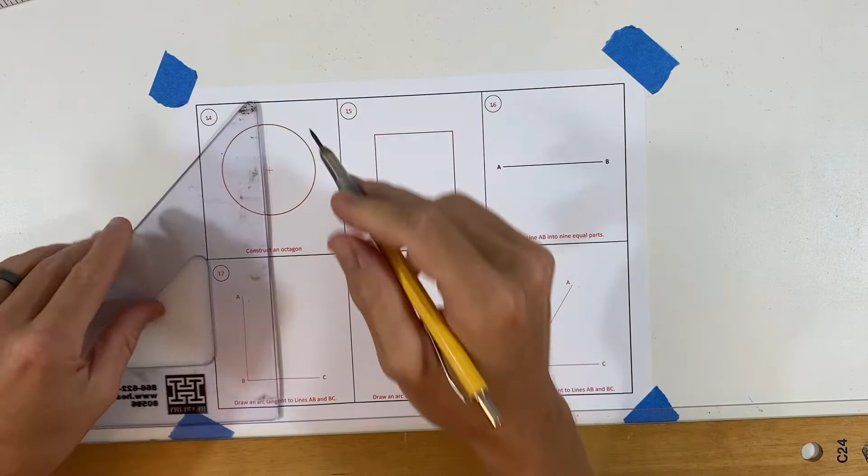This first method uses a center line and a circle. We already have a circle, we just need to complete our center line: long dash, small dash, long dash. It extends just beyond the outlines of the circle.

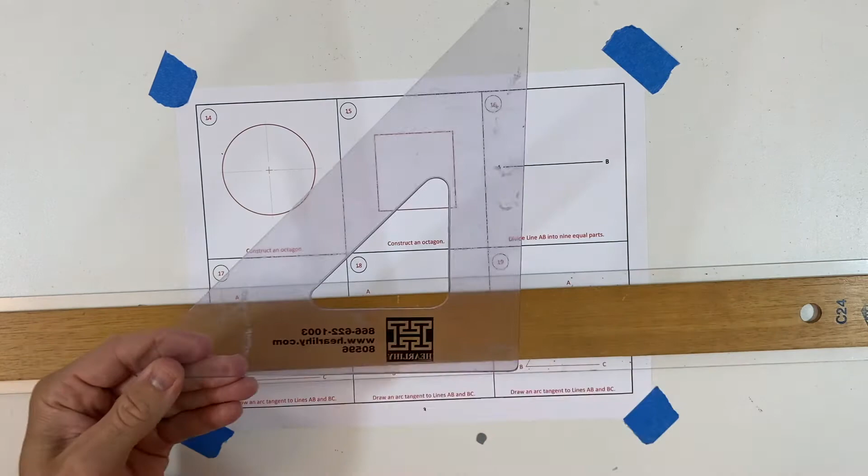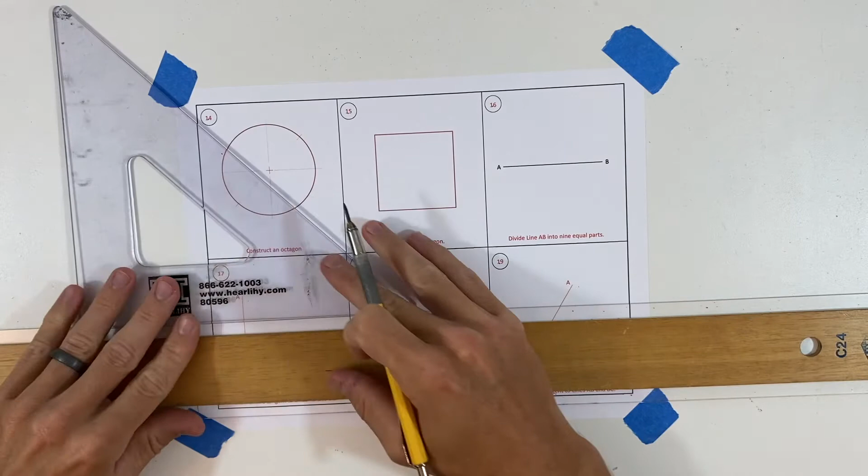Again, very light lines. The next step is we're going to draw two construction lines at 45-degree angles through the center of the circle. So I have my 45-degree triangle. I'm going to place it horizontally on my T-square, slide it over right until it lines up with my center point, and draw a construction line right through the circle. I'm really looking for this point and this point. I'm going to flip my triangle, the exact same thing on this side of the circle. Make sure your T-square doesn't slide off your drawing board.

And construction line, so extremely light. I'm looking for this intersection right there and there.

These intersecting points of the perimeter of the circle locate the exact points where the octagon will be tangent to the circle. Use the construction lines to draw two vertical and two horizontal lines that are tangent to the circle through the points located by the two center lines intersecting the circle.

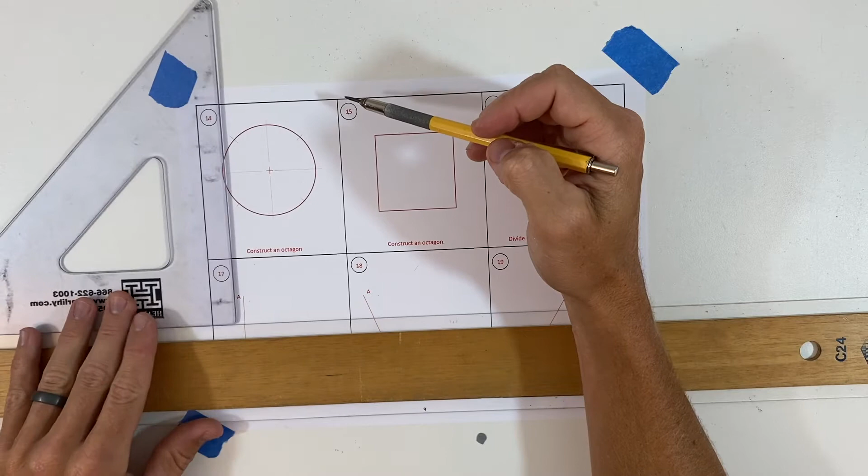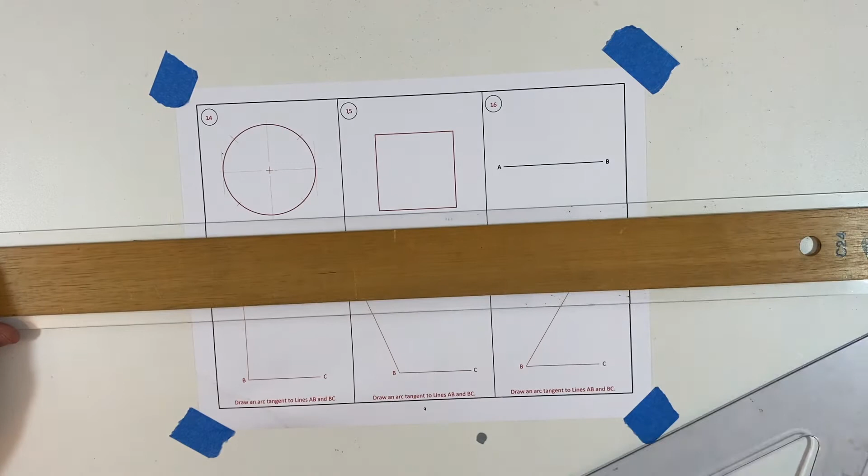So I can start by drawing vertical lines that are tangent to the edge of the circle. And a bottom and top line that is horizontal but still tangent to the circle. Make sure it is tangent, so it's touching but not intersecting.

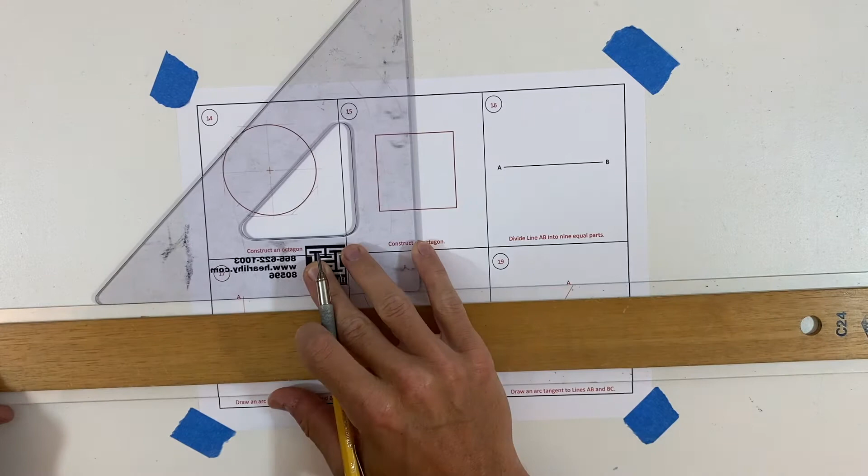Now I know exactly where to place those angled lines, right at those previous intersections. I could have done this in the reverse order because I know exactly where those tangent points should have been.

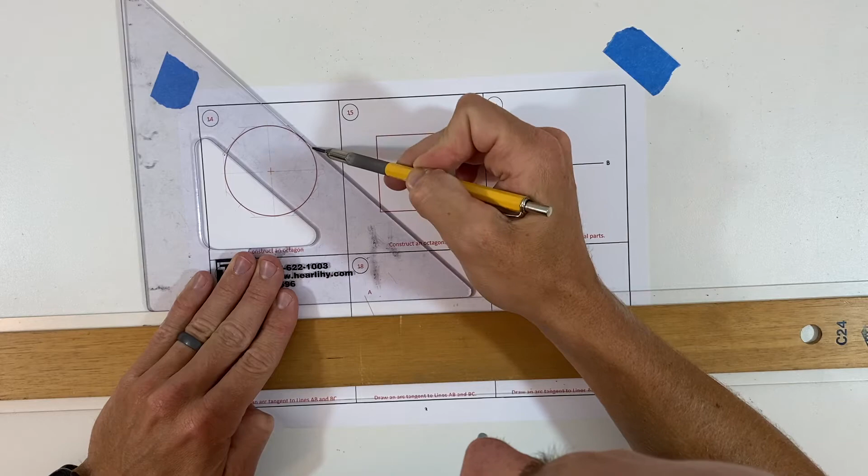Now I have an octagon, and I can clean up those edges with my eraser and eraser shield.

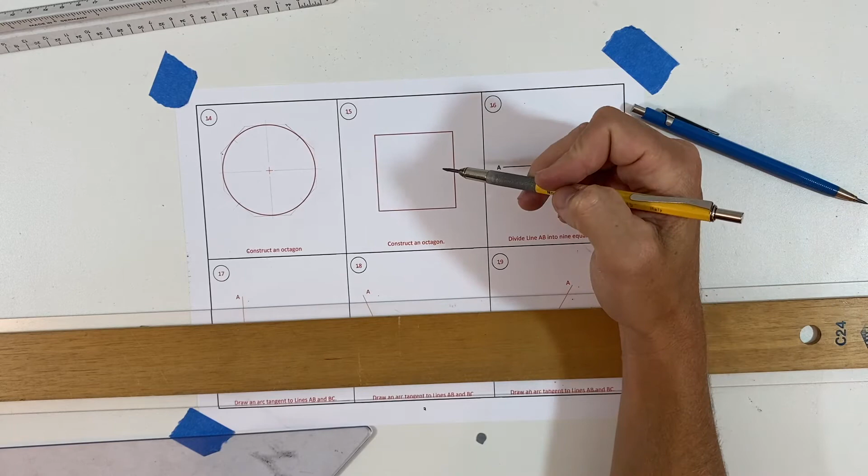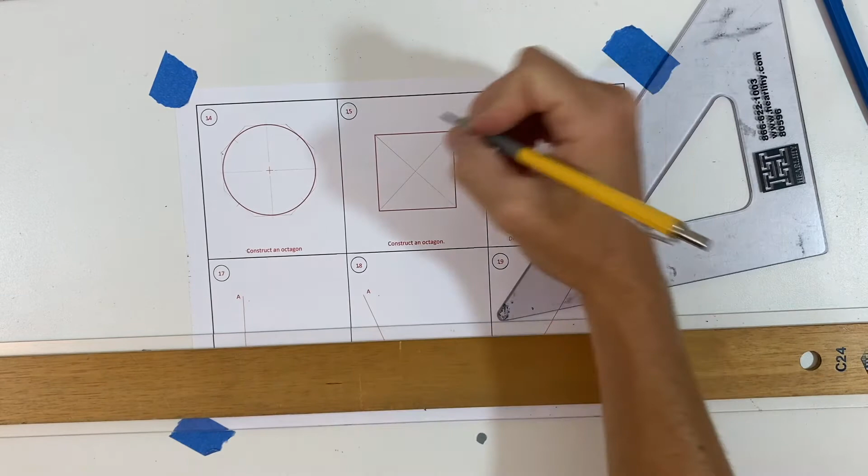This next exercise, we are going to complete another octagon, but we're going to use a square. So we have a square. Obviously it has 4 equal sides. We're going to start off by drawing diagonals similar to the diagonals that I'll show you now. So these points, I'll label A, B, C, D, and O for reference.

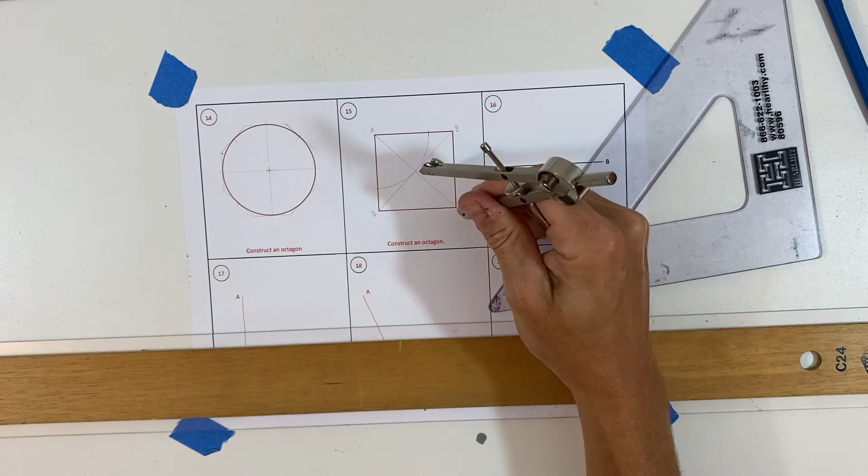I'm going to set my compass to radius AO, and I'm going to make an arc. I'm going to do the same thing with my center point on C, and also do the same thing to the other two corners.

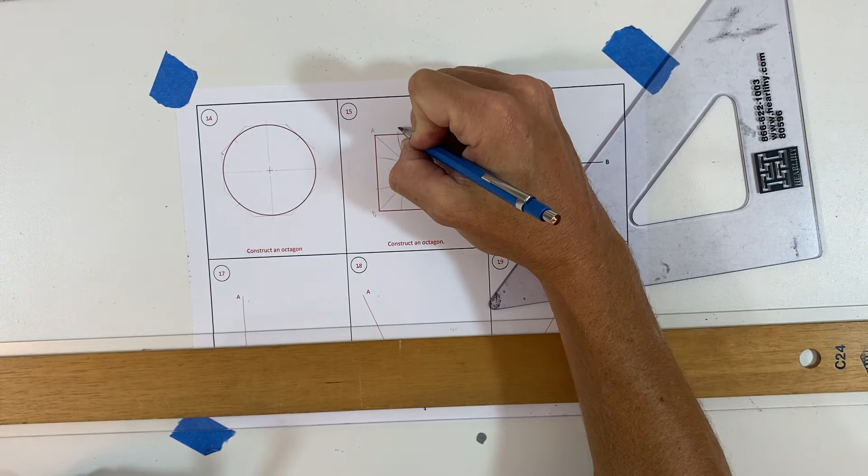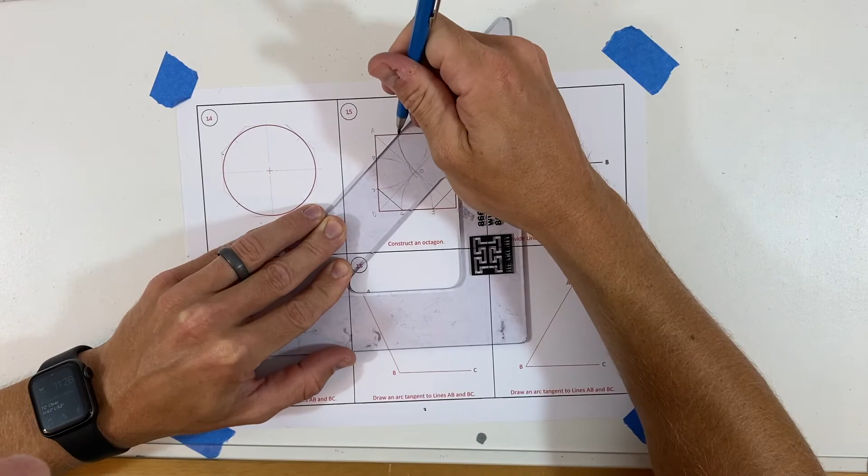Now what I have are these points 1, 2, 3, 4, 5, 6, 7, and 8. All I need to do is connect these points, and I've got an 8 equal-sided octagon.

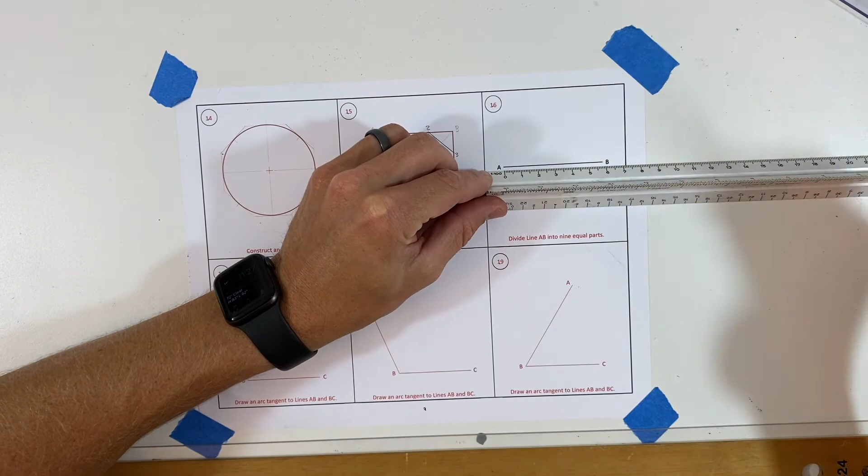For this one, we're going to divide this line into 9 equal parts. Now, whenever you have a line or a measurement that isn't easily divided - no matter what scale I use, this does not simply divide into an easy whole 9, or something that's divisible by 9. But I'm going to show you a trick that will make this a lot easier.

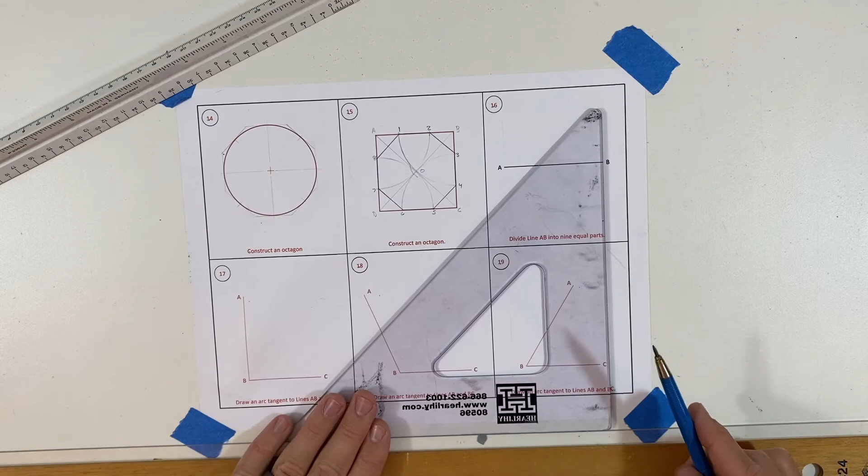I'm going to first extend A down so I can see a very, very light construction line that I can reference later. I'm going to do the same thing for B. What I'm going to do, for this example, I'm just going to use my millimeters - this is the metric scale. I'm going to place my ruler on here.

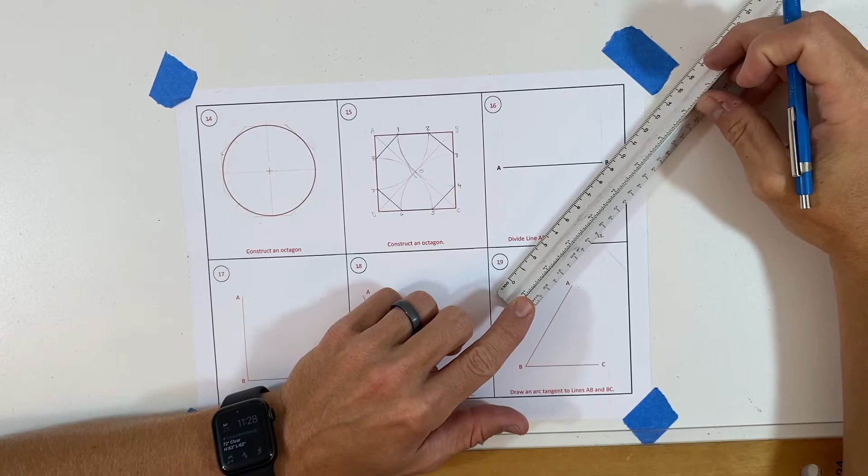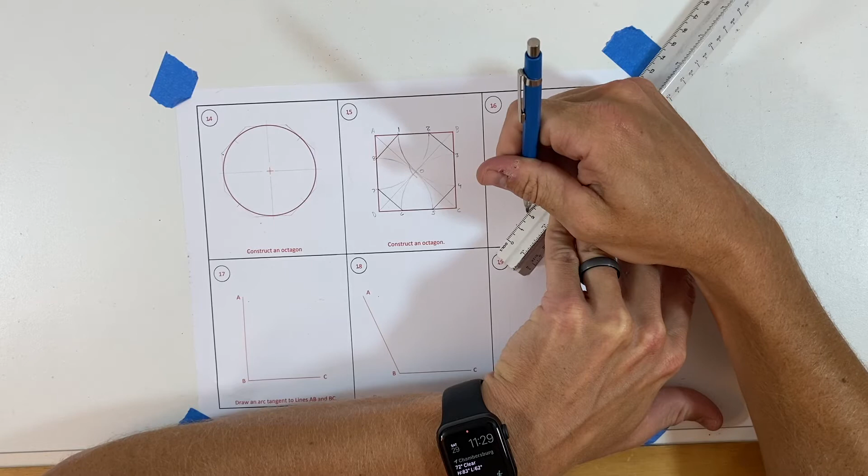I'm just going to use 9 centimeters, and place this on this line. So right here, this is point A extended, and this is point B extended up. I'm going to make it so that 0 lines up with A, and 9 lines up with B. Then I'm going to just put a dash or a tick mark every centimeter, dividing this up evenly into 9 equal parts. Now I can simply extend my measurements with a vertical line.

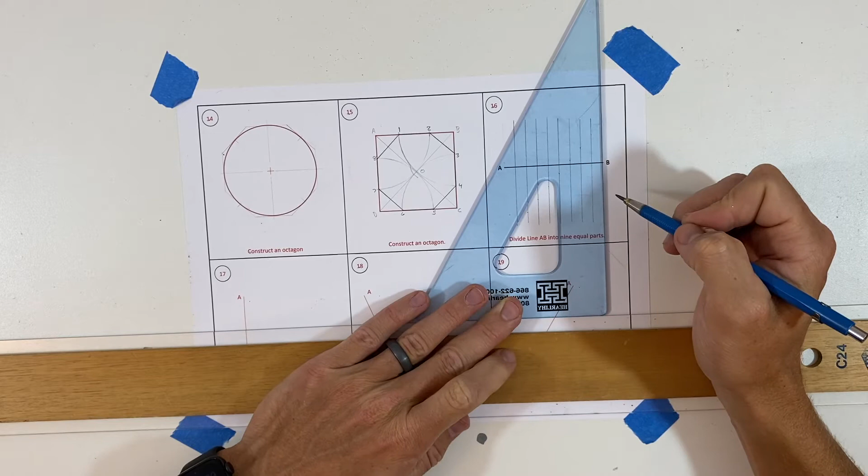And I'll darken down my first point of A.

Our goal is to create an arc that is tangent to lines AB and BC. So whatever that arc needs to be, well, it depends on the situation. But for this case, you're choosing it, so you can set your arc to whatever you want. Now your compass does have a little play, so remember what I said: the smaller the arc, the more difficult it is to use. So I'm going to set my arc somewhere to that, and just draw a really light arc.

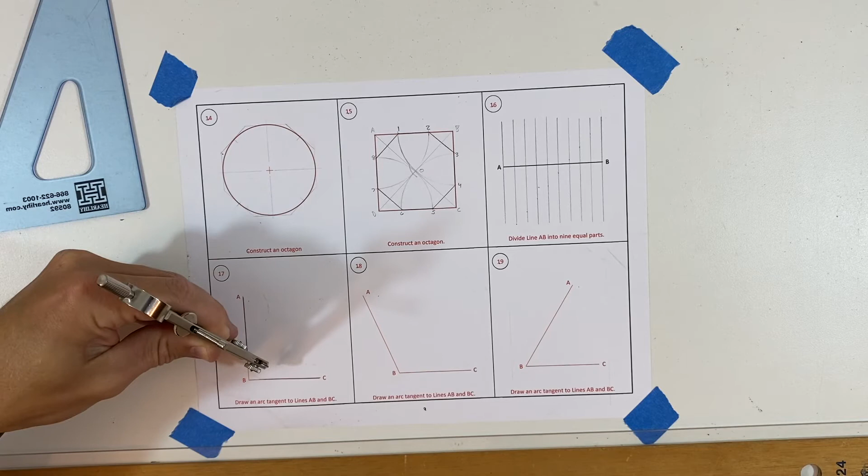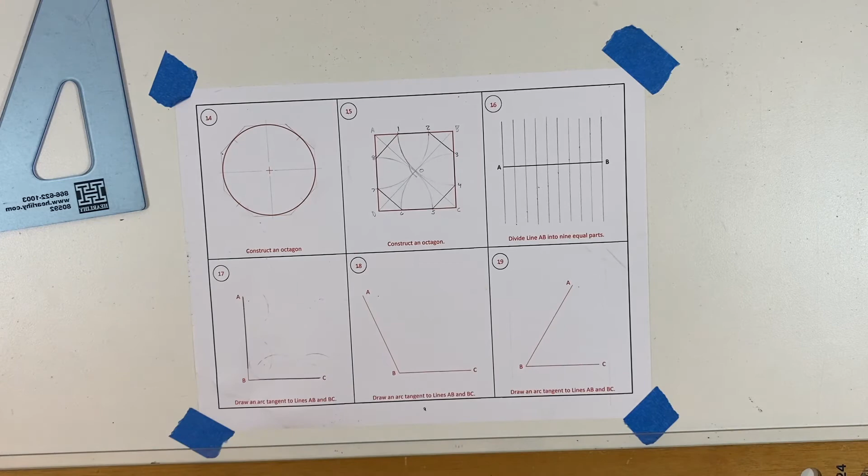There, and I'm going to come down and do another one. See how light I'm drawing it. I'm going to do the same thing along line BC. So I have 2 arcs off of the line AB and 2 arcs off of line BC. I'm going to draw 2 lines that are tangent to the 2 arcs I just drew.

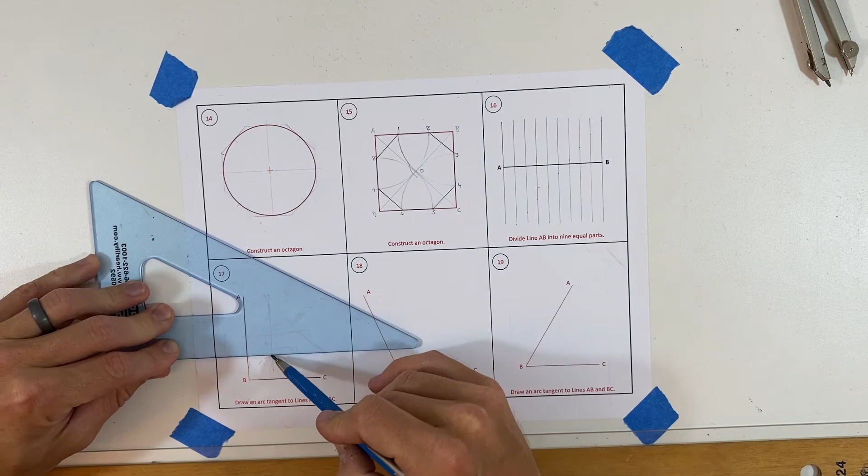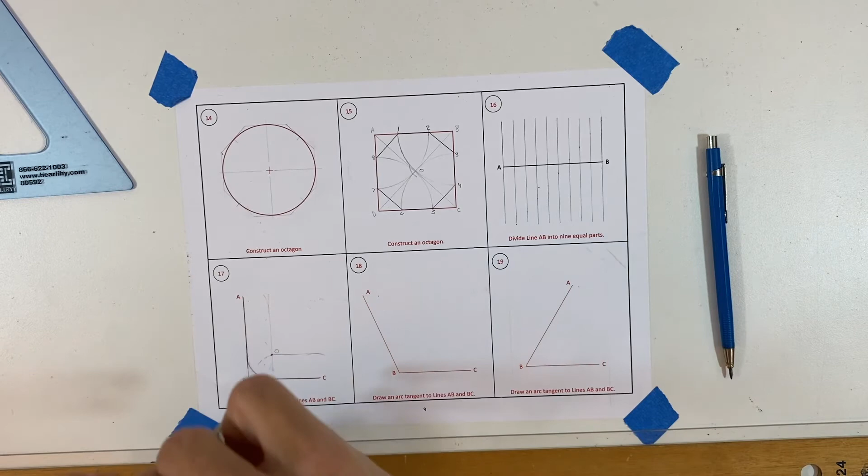Keep them light, as these are construction lines. This will give you this point right here - we'll call this point O. Point O will give you the center point for your compass that will tell you exactly where to locate the center point to create that tangent arc. Make sure your compass doesn't walk on you, and draw your line. If you're starting to get a double line, remember, clean it up.

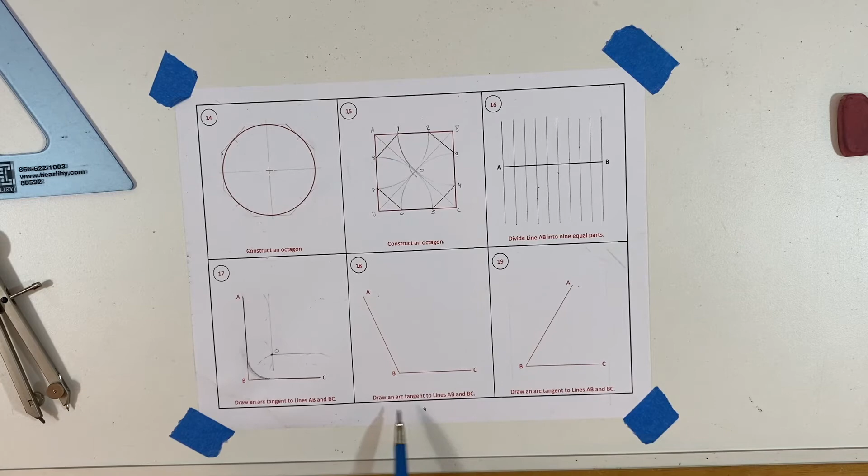So we're going to do the same thing for these 2 exercises: draw an arc tangent to lines AB, BC. I'm going to choose the radius I want to be tangent. If I wanted something very small, let's say 0.25, I could place my compass on my scale and make it 0.25. If I want something larger, like 1, I could do that as well. Now this is a very small line, so anything larger than 1, you're going to be running into some challenges. So I'm just going to make it closer to about 1/2 of an inch.

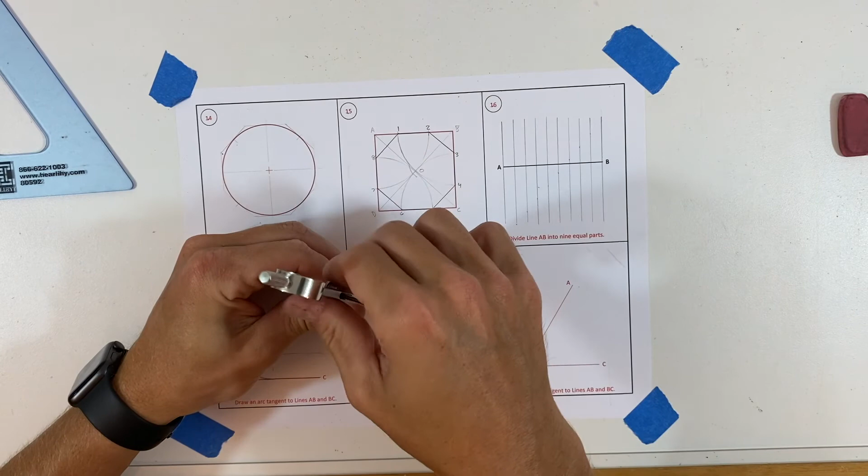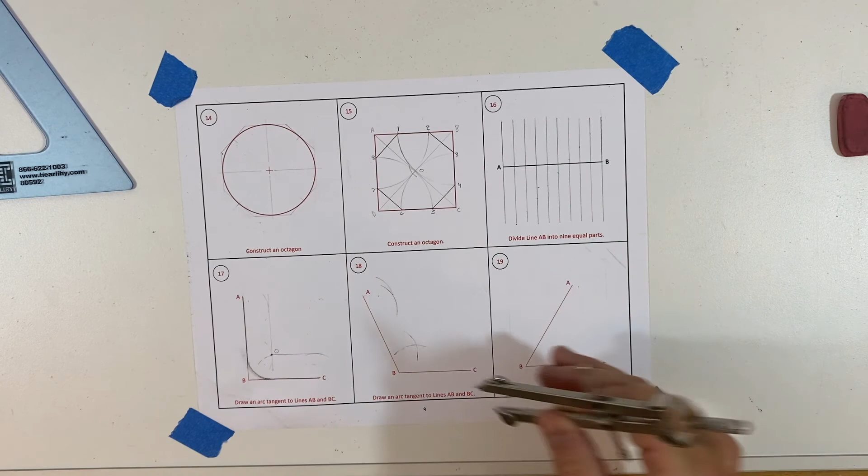And draw my arcs. Try that again. If you're having a lot of difficulty with your compass slipping, put some paper underneath what you're drawing on. That way it has a little bit of padding and it won't slide around as much. It'll act as kind of like a vinyl cover, similar to our drawing boards.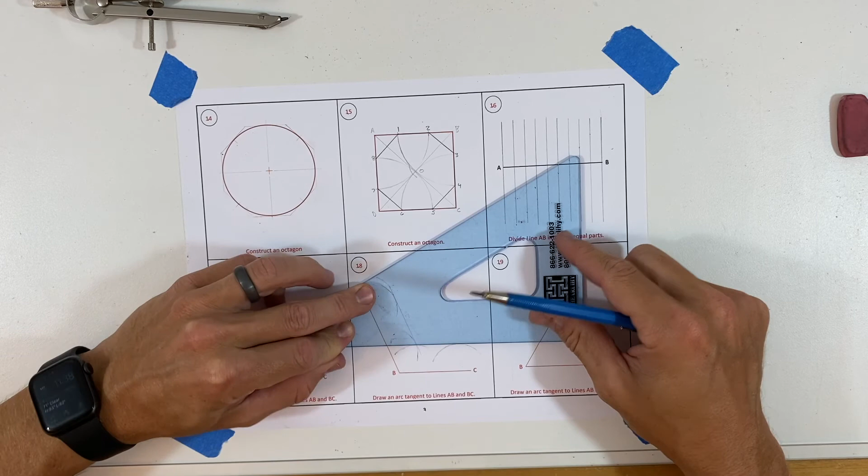So I'm going to draw a line tangent to those arcs, which should be parallel to line AB, parallel to this line, and a line parallel to line BC across these arcs, making it tangent, which gives me this point O.

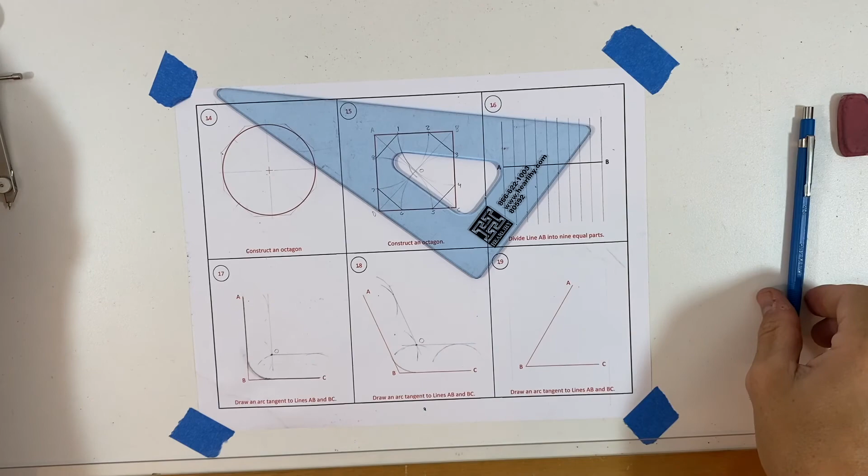Now I can take my compass and create my tangent arc. One more time, I'm going to make my compass a little bit smaller since I have a little less space here.

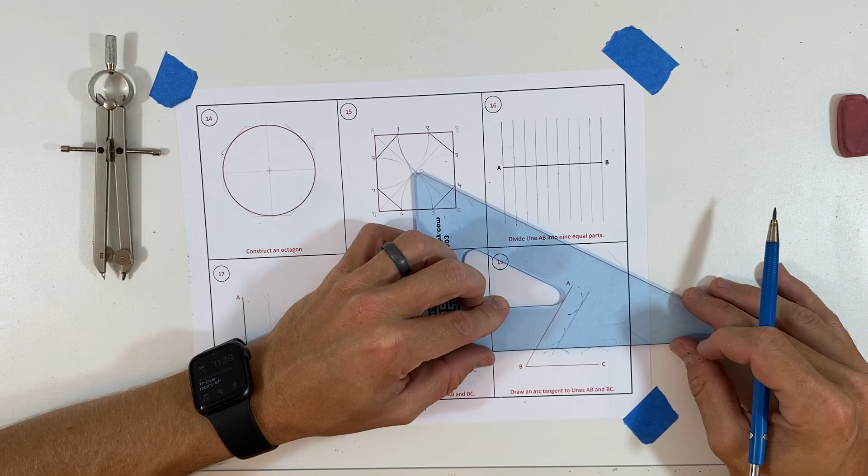Draw two lines that are tangent, making them parallel to lines AB and BC. We now have our center point O, and now I can create our tangent arc.